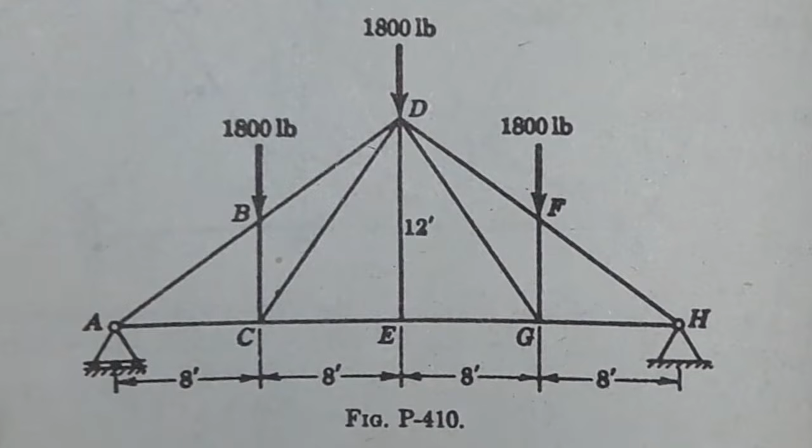So, ngayon, today is ano bang araw ngayon? Check ko ha. Tuesday, October 27, 5:58 PM. So, yun.

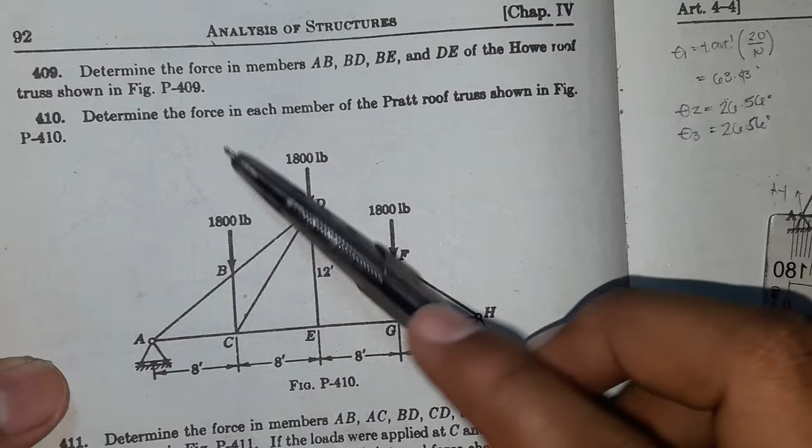So ngayon, yung problem natin is nandito pa rin tayo sa analysis of structures. So, problem 410: determine the force in each member of the Pratt roof truss shown in figure

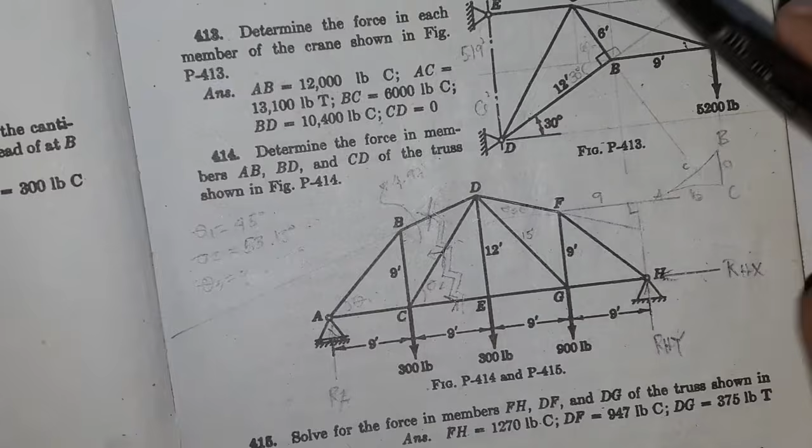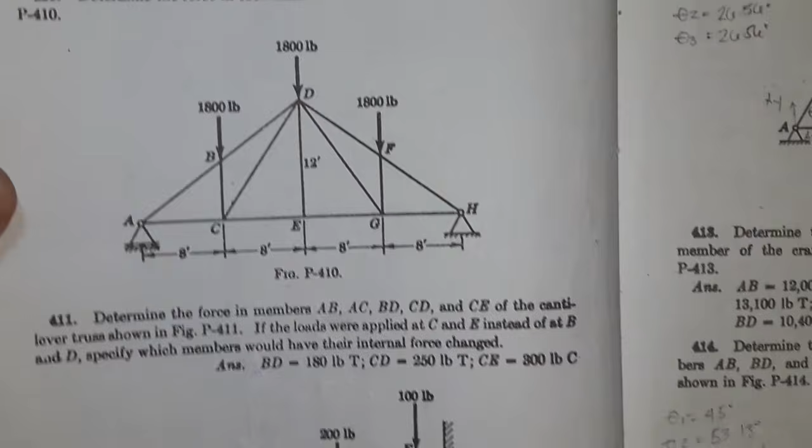P-410. So ito yung problem natin, and still gagamit pa rin tayo ng joint method. Siguro hindi ko na isusolve tong lahat na to para matakil ko agad yung method of section, siya na kasi yung sunod para kung may hinahabol yung iba na exam na may method of section, so at least may idea na yung iba. So sige, drawing ko lang to and start na agad tayo.

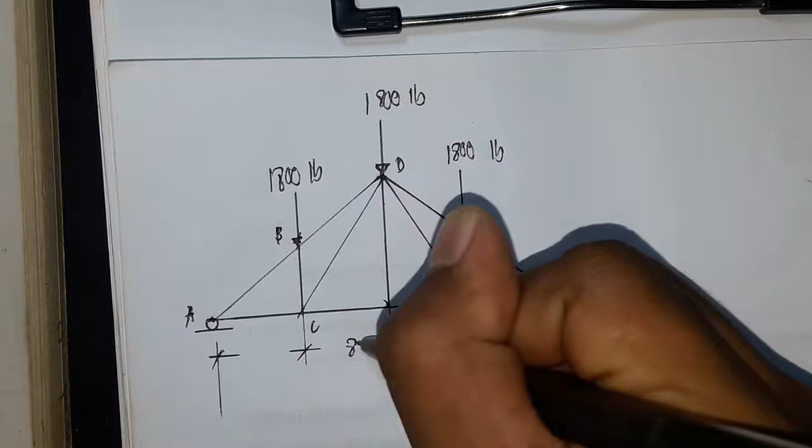So yun guys, drawing ko na siya. Medyo nakuha ko naman yung drawing, yung figure sa book. So ito yung given natin, my roller and my hinge. So we are asked to determine the force in each member.

So if nakikita nyo, yung figure natin is symmetrical siya. So may 1,800 dito, may 1,800 dito, and sa gitna also, meron tayong 1,800. So we can conclude na yung AB is yung stress or yung force, at yung stress o force sa member AB ay equal to FH. Isulat ko na lang dito yung mga equal stresses.

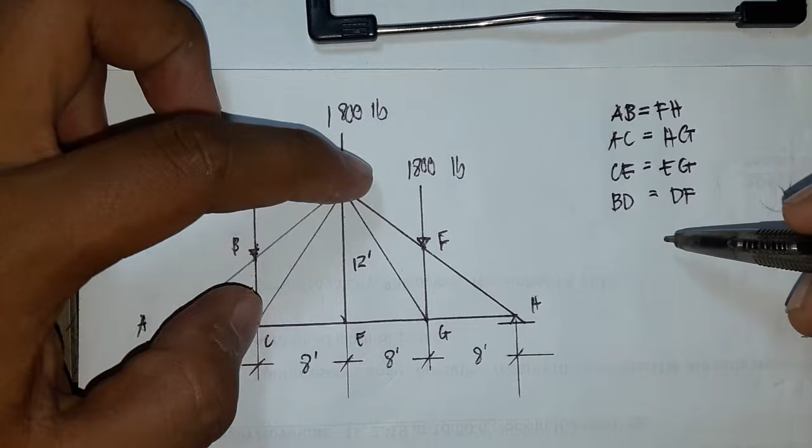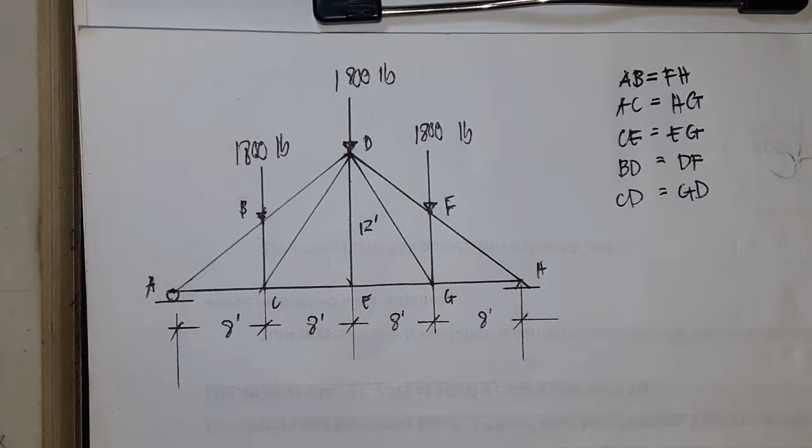Yan na, medyo nawawala-wala yung recording ko. So again, ito yung mga same forces. So ngayon, hahanapin na natin using method of joints.

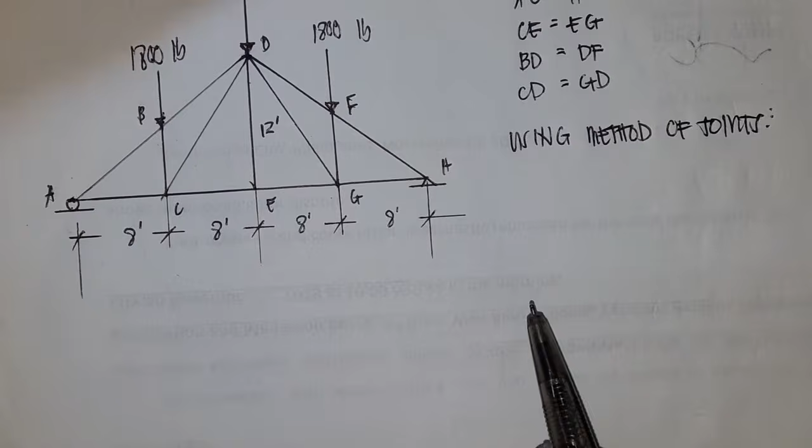So yan, using method of joints. So first, gaya ng sabi ko dati is unahin natin, pero inspect natin yung problem. Dito per joint, syempre yung pinaka less na member na pwede nating unahin ay yung joint A and joint H kasi may dalawang member lang sila. So ngayon ang una natin gawin is hanapin natin yung reactions para may magamit tayo sa joint na yan.

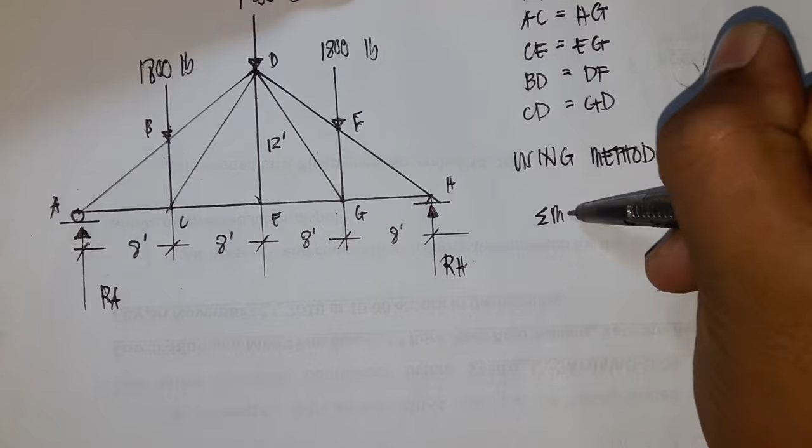So reaction at H and RA, yan sila dalawa. Summation of moment lang tayo on each point. Summation moment at H equals to 0. Zoom out ko lang konti kasi medyo hindi na siya ma-fit sa frame.

Yan, so ngayon RA positive 2, so 8 times 4 is 32. Then yung 1,800 natin, lagay na lang natin 1,800 times 3. So meron tayong minus 5,400.

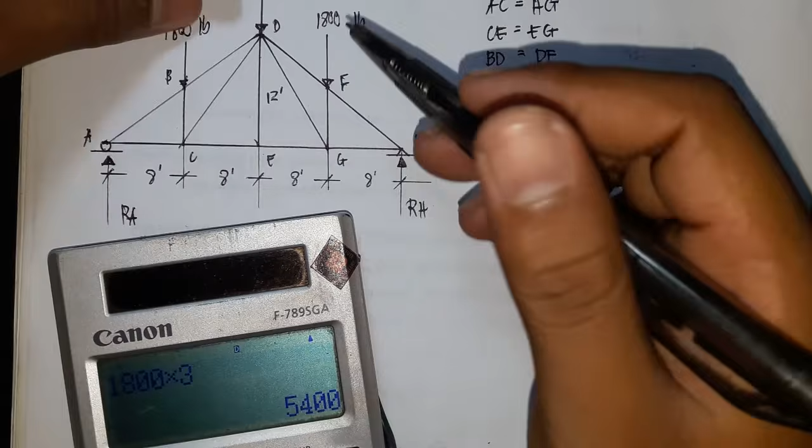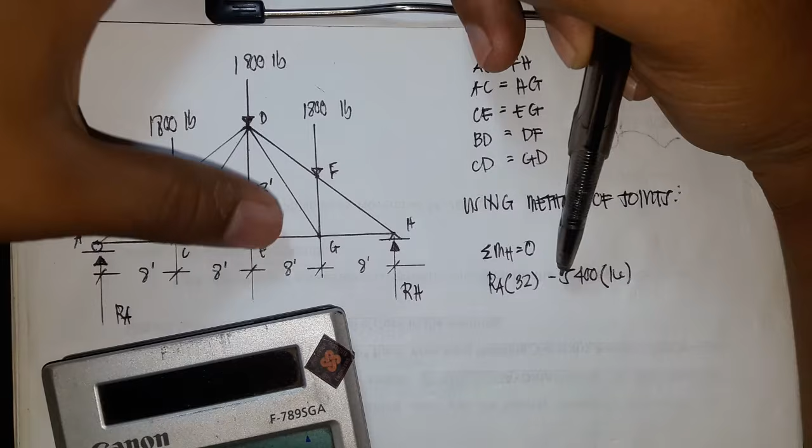So yung distance is 16, pwede nyo din siyang isa-isahin guys. Pwede nyo siyang gawing 1,800 times ito, at itong 1,800 times 8 and 1,800 times 16. Sa akin, diniretso ko, kinuha ko yung resultant nila, at alam ko na yung resultant ng tatlong to ay 5,400, at dito yung location niya sa gitna kasi symmetrical naman to. So dito siya yung location ng 5,400. Ginamit ko na yung distance na 16, pero pwede nyo din yung isa-isahin.

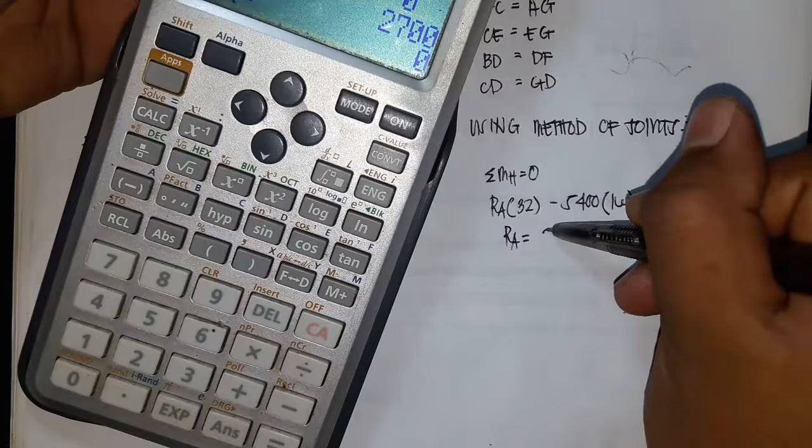So ngayon yan equals to 0. So RA ko is 32x minus 54 times 16 equals 0. So meron akong 27.

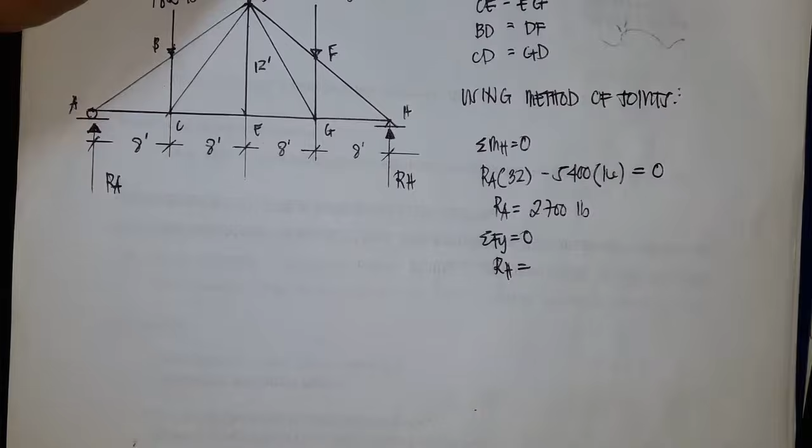Then next, pwede nyo din mag summation of forces y equals to 0 para makuha yung RH, for the record lang. So 27 plus x. Hindi ko na isusulat yung equation, guys. Syempre meron 27.

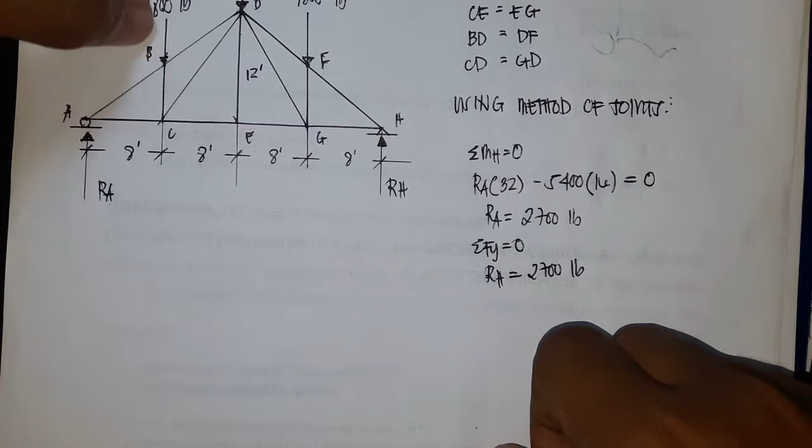Pwede nyo din naman idiretso guys kasi symmetrical lahat, so kung ano yung dito, most probably dito rin 27 para ma-counter yung 5,400 na loads, yung tatlong loads na to. Syempre same talaga yun sila. So yun, mayroon na tayong reactions.

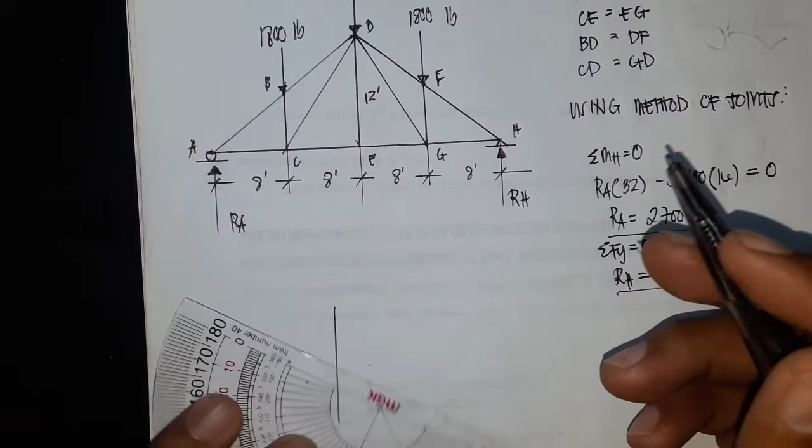Ngayon start tayo mag method of joints, ako start ako dito sa A. Gawa ako ng cross dito, lagay ko at joint A. So at joint A meron akong RA which is 2700, tapos meron akong AB and meron akong AC. So kailangan kong hanapin to, yung angle na yan.

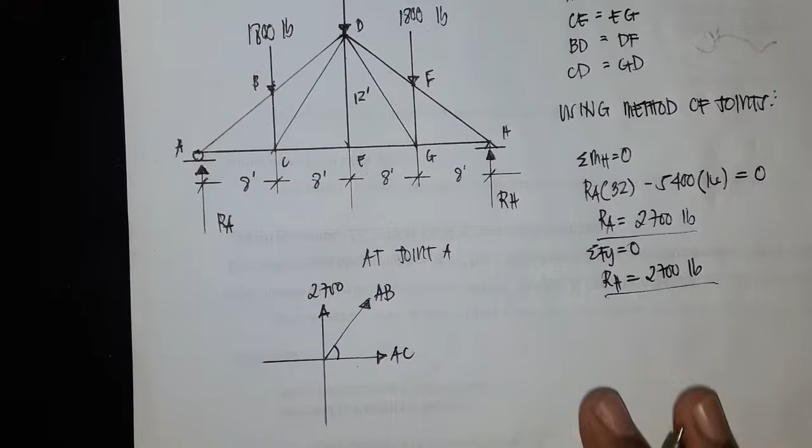So yung angle na yan is theta. Syempre alam niyo naman sa point na to kung paano maghanap ng angle, so 36.86, yung theta dyan. 36.87, round off ko na lang para hindi tayo ma-short.

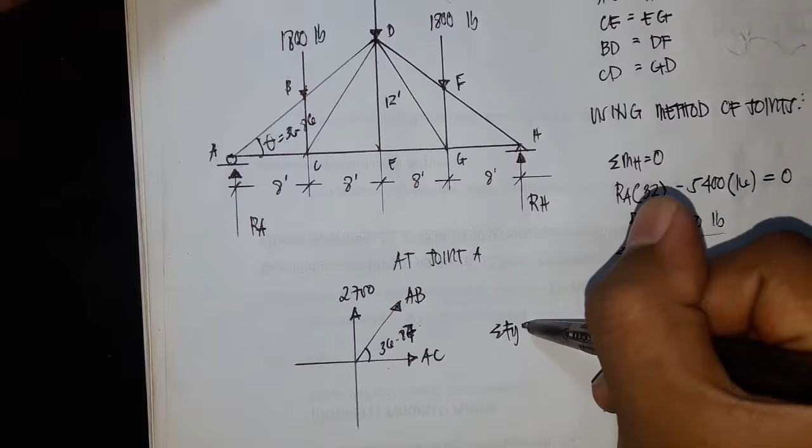So ngayon masosolve ko agad yung AB. Summation of forces y equals to 0. So 2700 plus AB sine 36.87 equals to 0. So AB, 2700 plus AB sine 36.87 equals to 0.

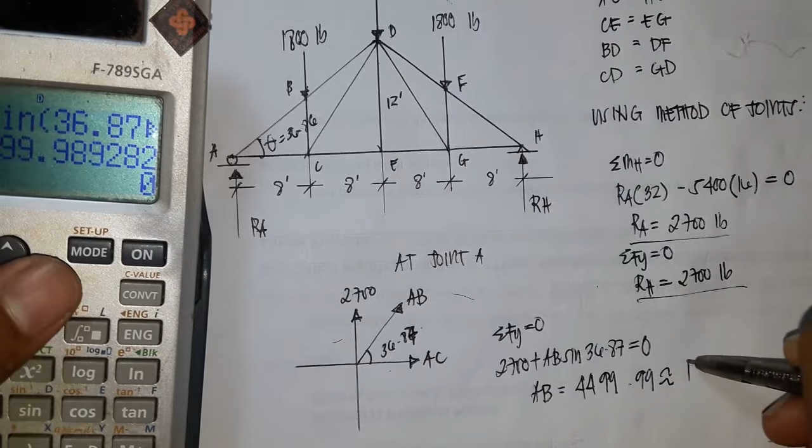4499.98, so 45 siya, compression. Correct ba siya? 36. 4499.99, or pwede na siyang gawing 45 compression.

So yan. Ngayon meron na tayong AB. Dalawa na yung nasolve natin, AB and FH. Therefore we conclude na yung isusolve lang natin is half itong part lang nito, di ba?

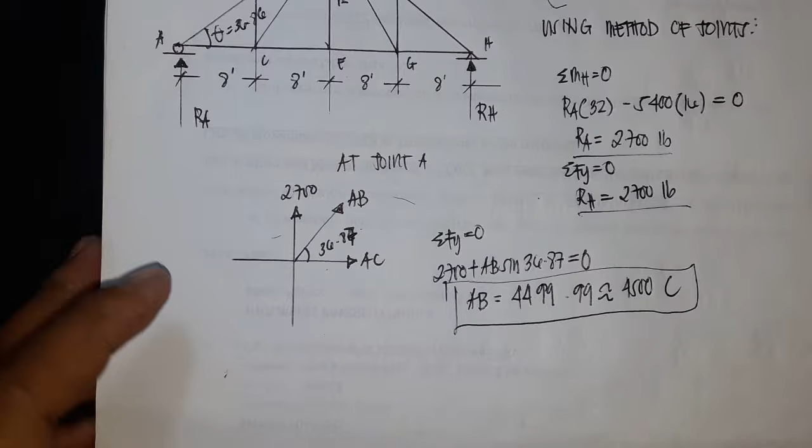So AC meron na din tayo. Tatlo na lang yung kulang natin kasi equals lang din naman yan sila lahat. Ngayon for BD and BC, hindi tayo pwede maka joint method dito kasi meron tayong AC pero may 3 unknowns tayo, and yung equation natin alam natin na dalawa lang, so hindi tayo pwede mag joint method dito.

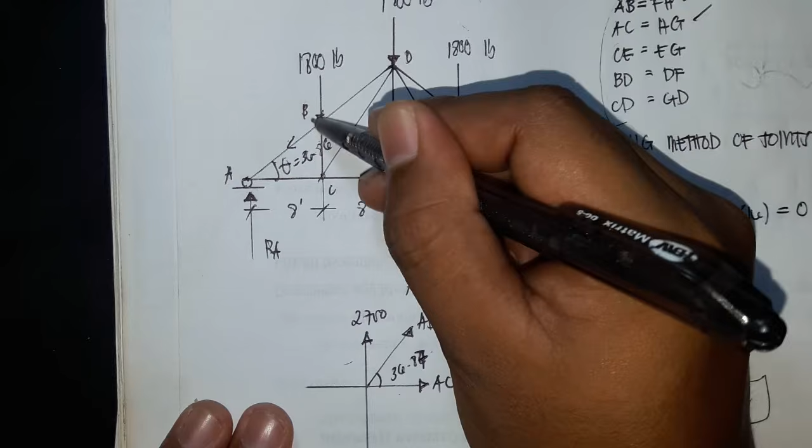So dito tayo sa point B or joint B kasi meron na tayo dyan. Dalawa yung unknowns natin, BD and BC. At joint B,

Lagay ko dito yung 1,000. So 1,800. Dalawa yung forces going down. Meron akong 1,800. Meron akong BC. Tapos meron akong ganito, which is BD and BC.

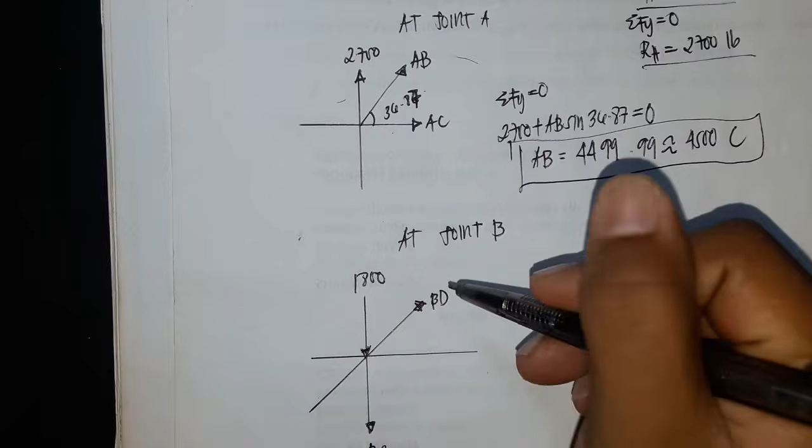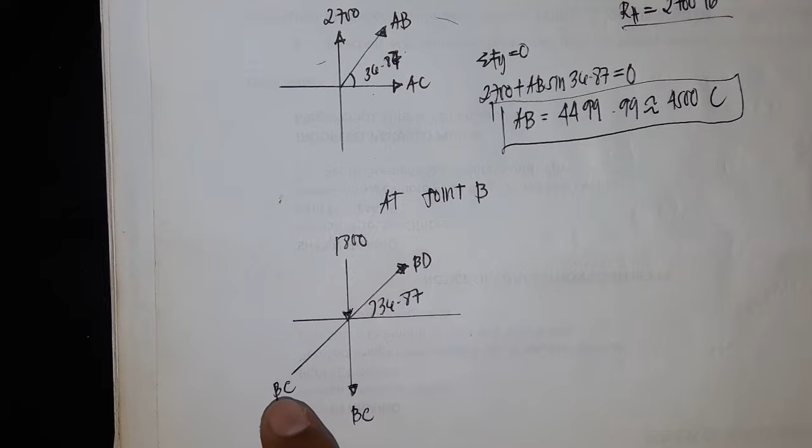Ngayon ang angle same lang, 36, di ba? Same lang, 36.87 yung angle dyan. Pag mag summation of forces x ako, meron na akong answer dito, di ba? BC, I mean yung BA to BA.

Yung BA ko is compression, meaning going up pala siya. So AB is compression, ganito siya guys. Dun going siya to the center. So BA is 4500 na siya. Dahil compression yung answer natin dito sa AB, meaning pagdating dito is compression din siya. So yun, going siya dun sa joint o sa point ng B.

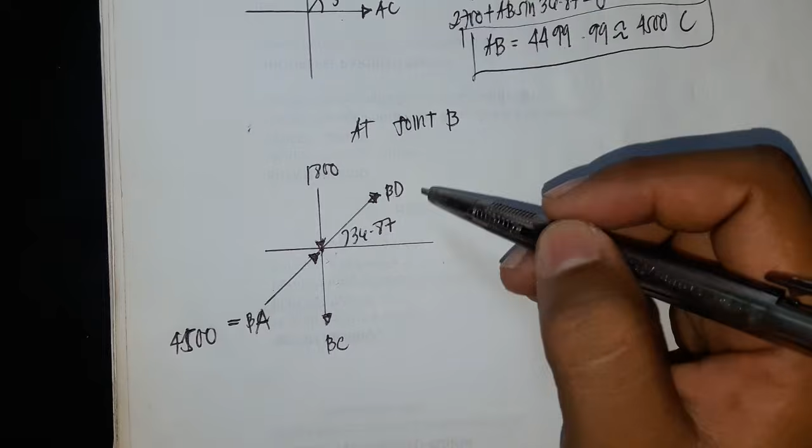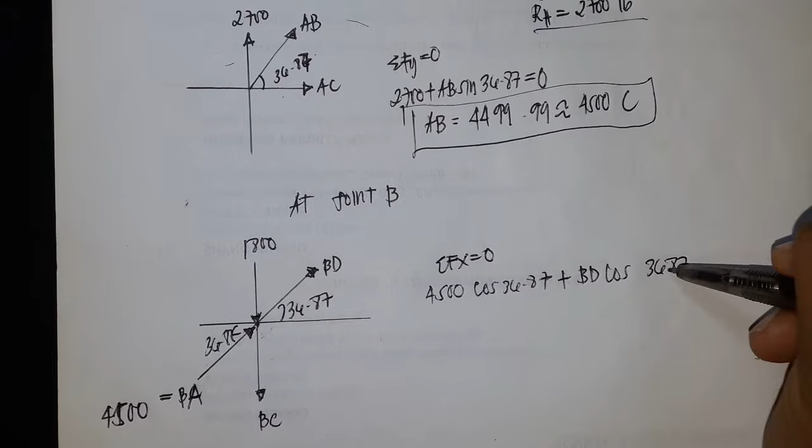4500. So mag summation of forces y ako or x, masosolve ko agad yung BD. Summation of forces x equals to 0. Meron akong positive 4500. Same, 36.87. Cosine of 36.87 plus BD, cosine of 36.87 equals to 0.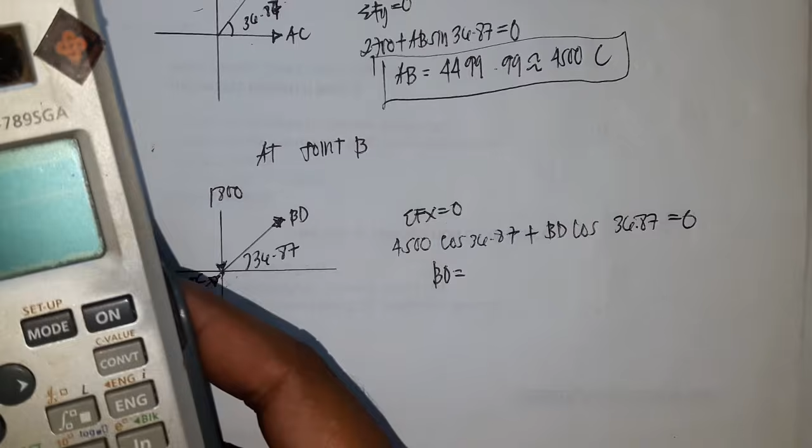So BD, yun, hula ko compression pa rin to. 4500 cosine 36.87 plus BD cosine 36.87 equals to 0. So yun, same, 4500 pa rin siya. Siyempre kasi transpose and divide, summation of forces x, tama.

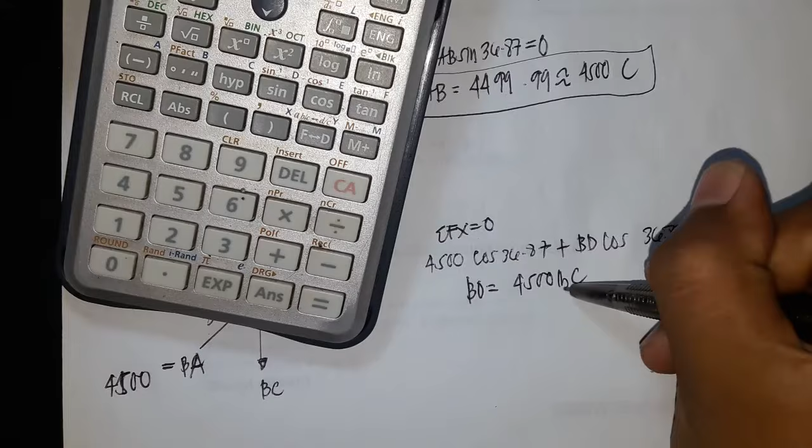So 4500 compression, so lb yun. BD, check na yung BD natin, meaning yung DF is solved na rin. Next is yung BC, summation forces y equals to 0.

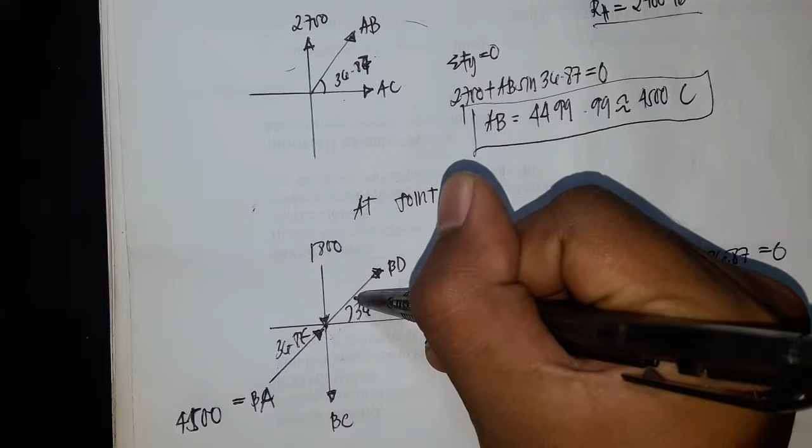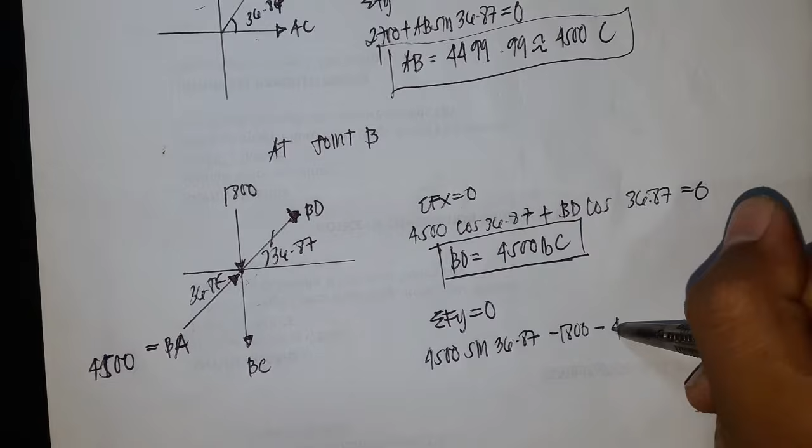So yan mali, ilagay ko ng slash ako dyan para malaman ko na wrong yung direction ng BD ko, meaning instead na going doon papalayo o tension, dapat going siya papaloob. Ngayon, summation of forces y, meron akong 4500 BA sine of 36.87, meron akong 1800, tapos meron akong minus na 4500 pa rin sine of 36.87. So plus or minus BC equals to 0.

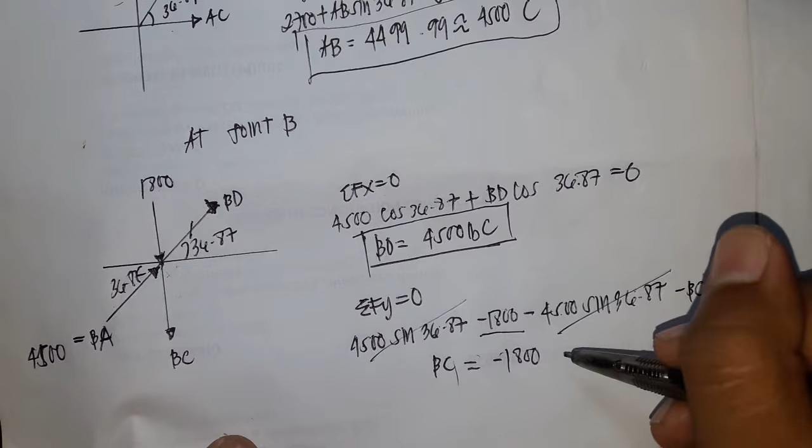Kung napapansin nyo, 4500 sine 36, 4500 sine 36, so cancel out na yun sila dalawa. So BC, transpose natin sa kabila yung BC. Yung remaining na value natin is yung 1800. So positive yung BC, meaning yung 1800 is remaining siya na negative. So yun, compression pa rin yung BC natin.

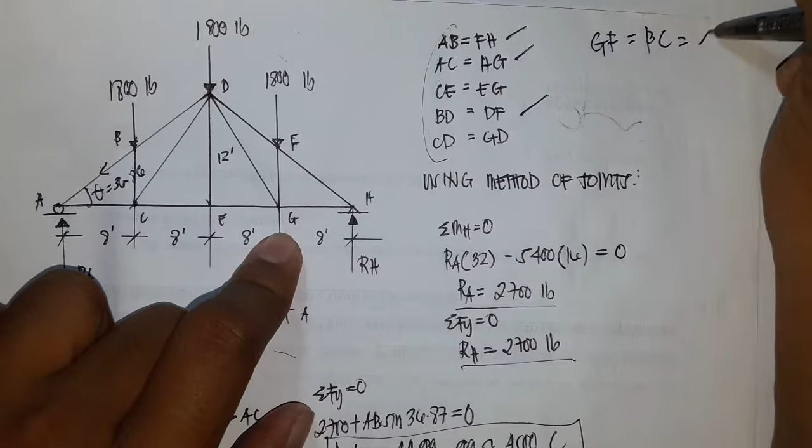So BC, saan yung BC? Hindi ako nakagawa ng BC at GF. Wala, GF equals to BC. Check na yan siya. Yun, kulang na lang tayo ng dalawa. So CE and CD.

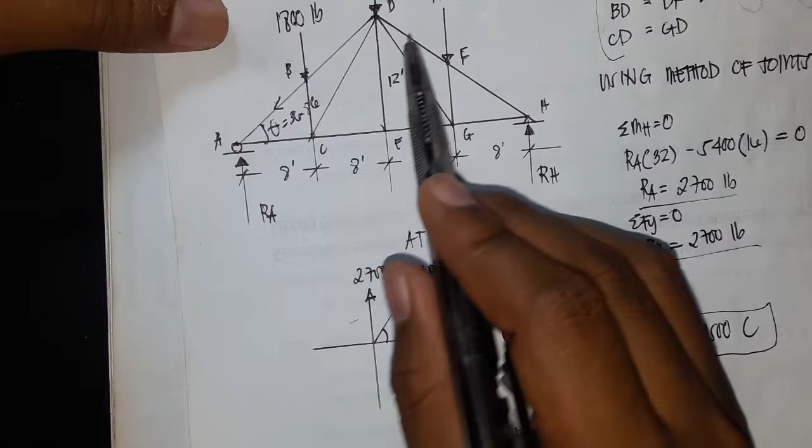Ngayon at joint C na tayo, kasi meron na tayong ito and meron na tayong AC and BC. So yung ano natin dito is CD and CE. Yun. Pasensya na, may nag-chat lang sa akin.

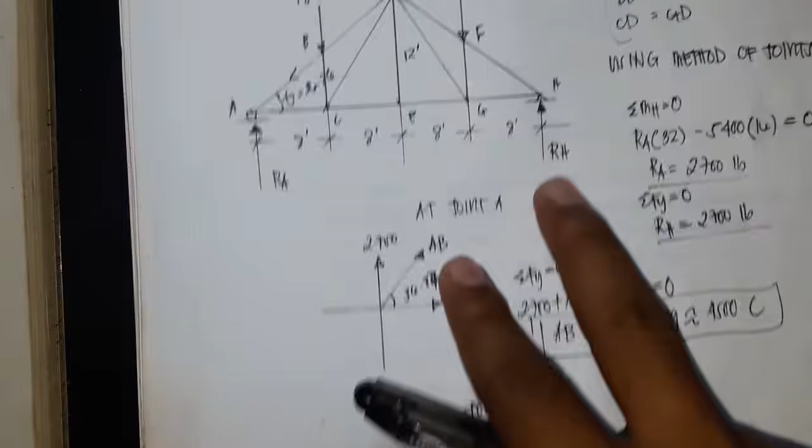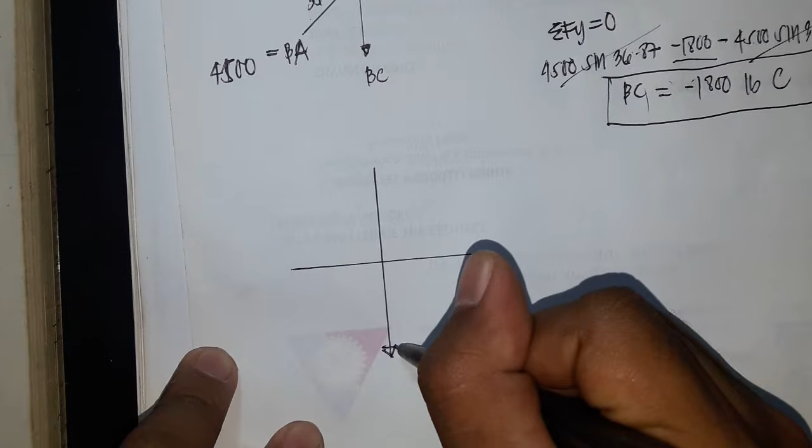Ngayon, continue tayo sa joint. Sa joint C tayo guys, joint C. Kasi yun na lang, kasi nasunod na natin yung tatlong yung ibang. Sa joint C, meron tayong BC. Yung BC natin is compression, so ilagay ko siya sa baba. Ilagay ko yung BC natin dahil compression siya.

So dito tayo, di ba? Sa itong part na to, focus kayo dito sa CB, CA, and CE, and also CD. Dyan tayo part na guys. Dahil compression ng BC ko ito, so ilalagay ko siya dito sa baba. 1800.

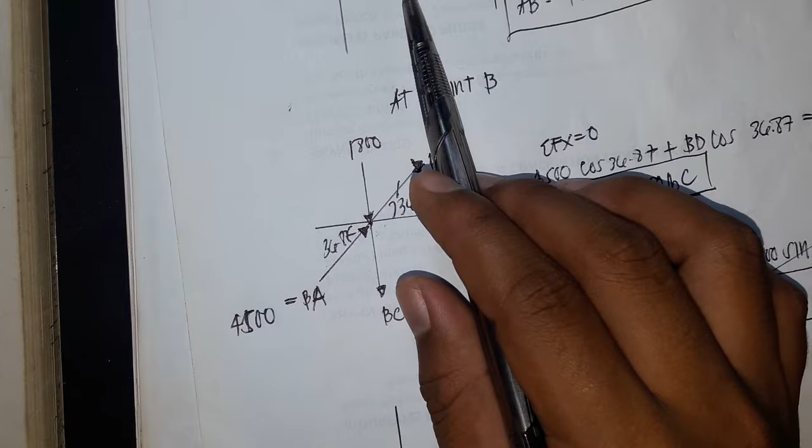Tapos yung AC ko is compression ba siya? AC. Sana yung AC ko dito. Hindi ko sinolve yung AC kanina. Hindi ko siya sinolve, no. So balikan ko to.

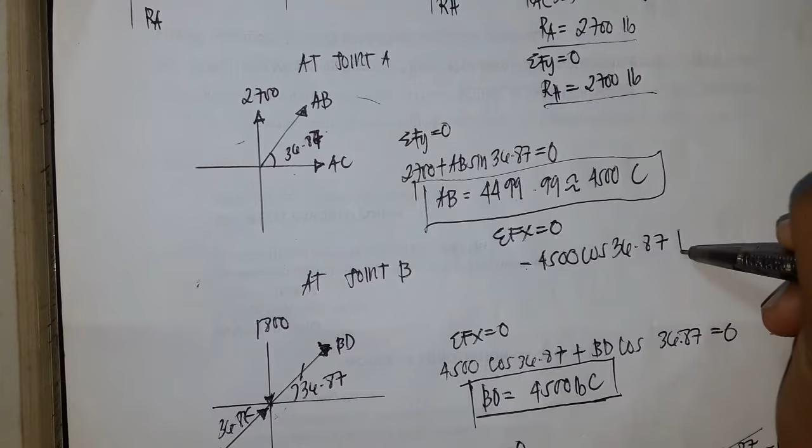Summation of forces x ako. Summation of forces equals to 0. AB compression, meaning going to the left, so minus 4500 cosine of 36.87 plus AC. Yung AC ko, sorry, nakalimutan kong isolve yung AC kanina. 4500 cosine 36.87 plus AC.

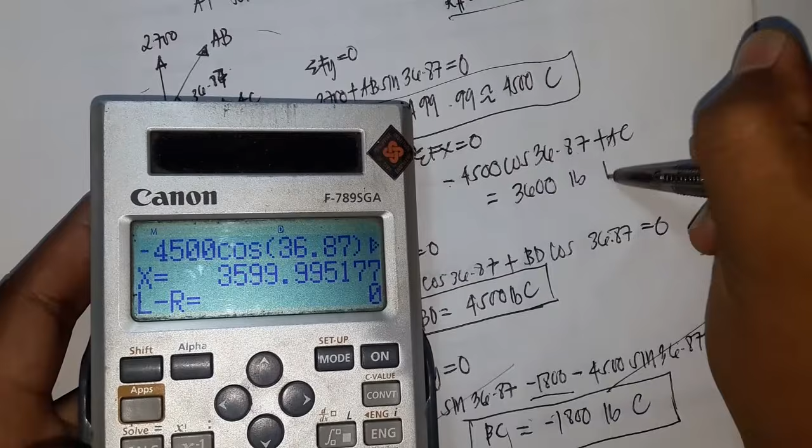So yun, 3599, 3600 na siya. Round off natin siya. 3600. So, positive meaning tension siya. Tension yung AC natin.

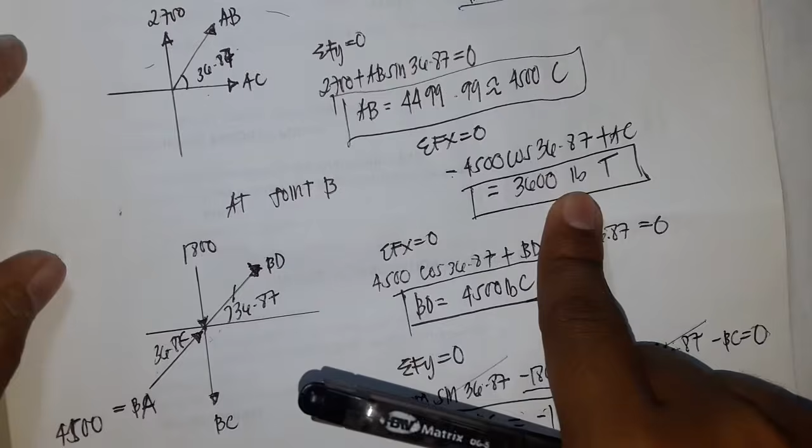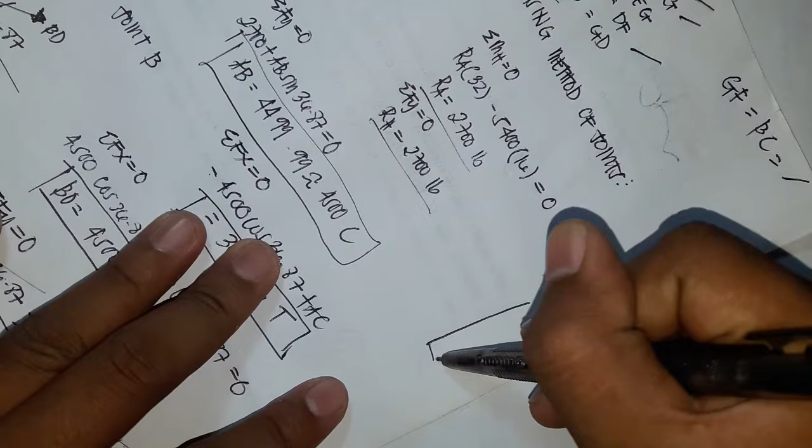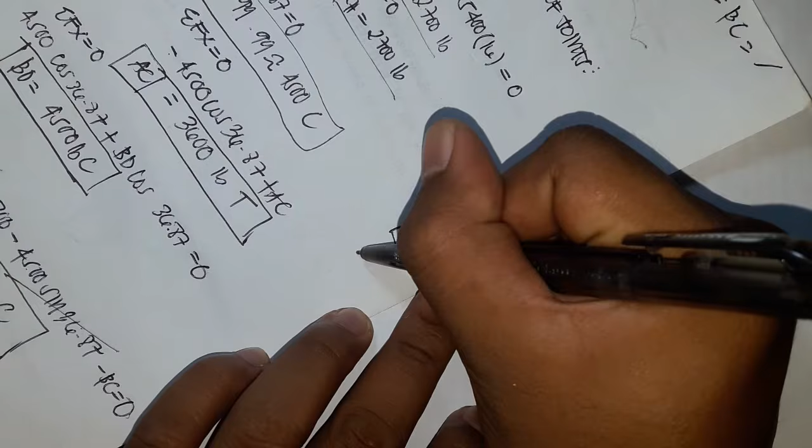So, AC is 3600, meaning it's tension, so tension din ilalagay natin. Meaning guys, kapag tension and compression - pag tension, hinihila niya or going out yung force. For example, ito yung member AC, tension siya, di ba? Nasolve ko member AC, so ito yung AC is tension siya. Para ma-visualize nyo lang, meaning yung forces dyan is hinihila niya, yung stresses dyan, hinihila niya si AC, which is 3,600 and also 3,600. Yan yung parang visualization niya.

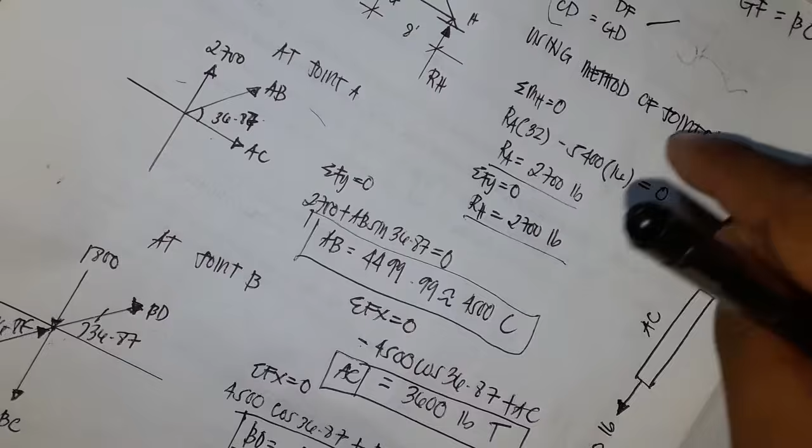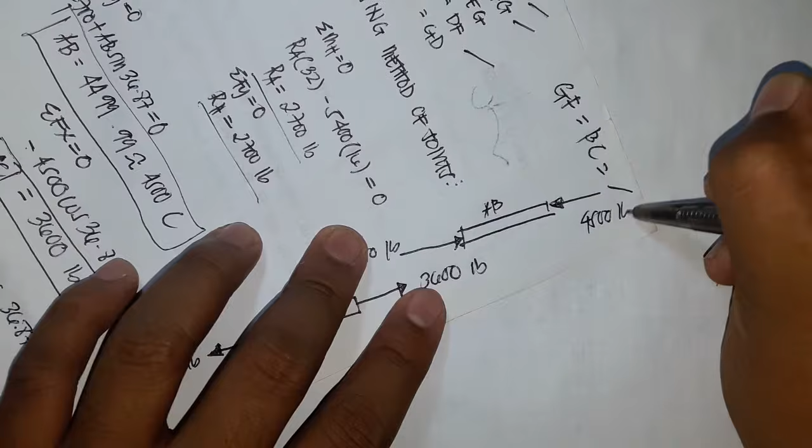Tapos kapag compression naman, so ano yung example natin dito? So AB, si AB rin for example, member AB. Compression daw siya, so meaning iniipit niya si member AB, which is 4.5, 4.5 yung magnitude. Yan yung compression siya. See, ito yung tension.

So pag may ibang visualization, share nyo na lang sa akin.

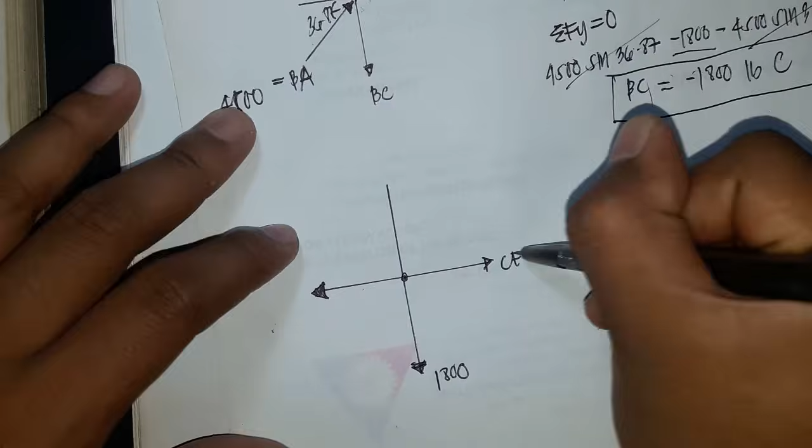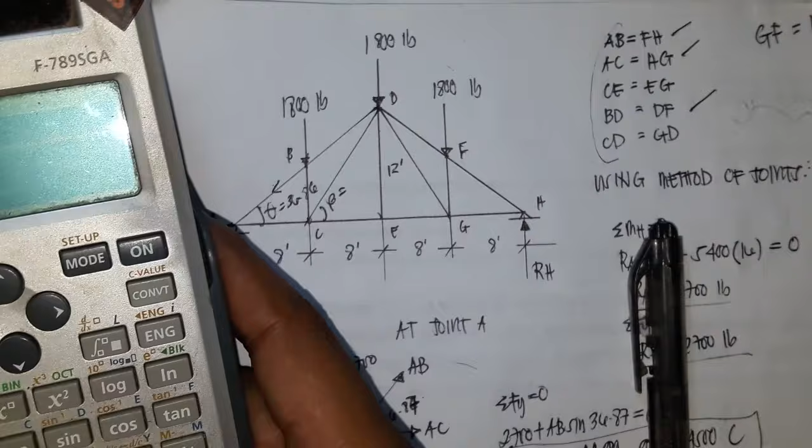So ito yung CE, yung CA ko is 3.6. Then meron akong CD, ito yung CD. Siyempre may angle ako dyan, ito yung angle dyan. Lagay natin yan, so again tangent tayo, 12 over 8, meron tayong 56.31.

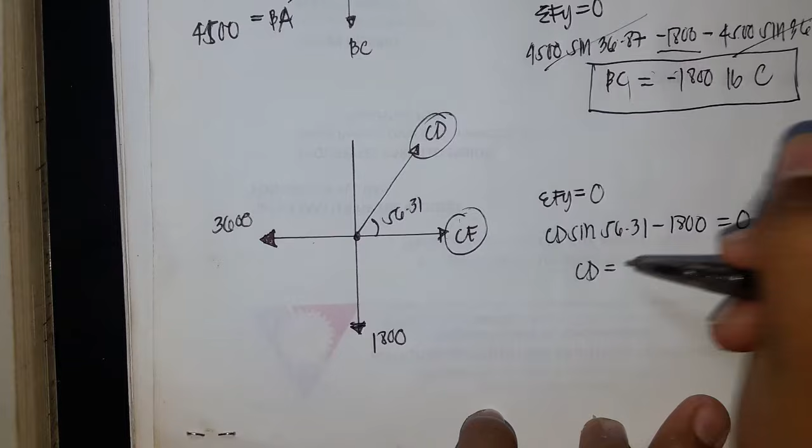So ngayon guys, makita yung figure natin. By summing up forces Y, masolve agad natin yung CD. Summation of forces X, solve yung CE. Summation of forces Y: CD sine 56.31 minus 1,800, yun lang, meron na tayong CD. X sine 56.31 minus 1,800 equals 0, so meron akong 2,163.33, tension siya guys.

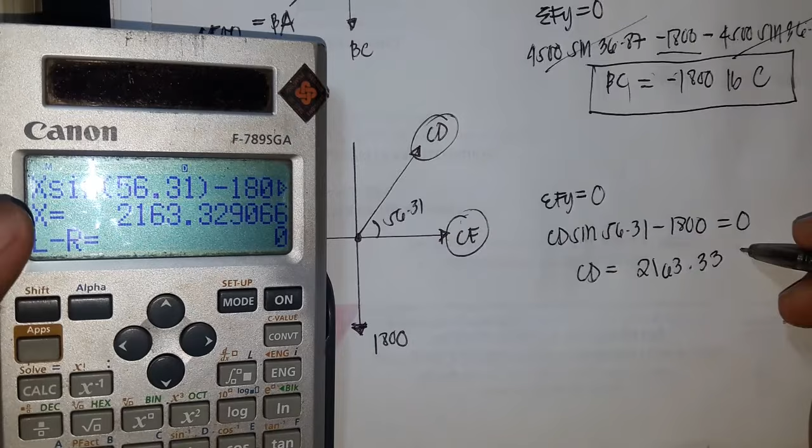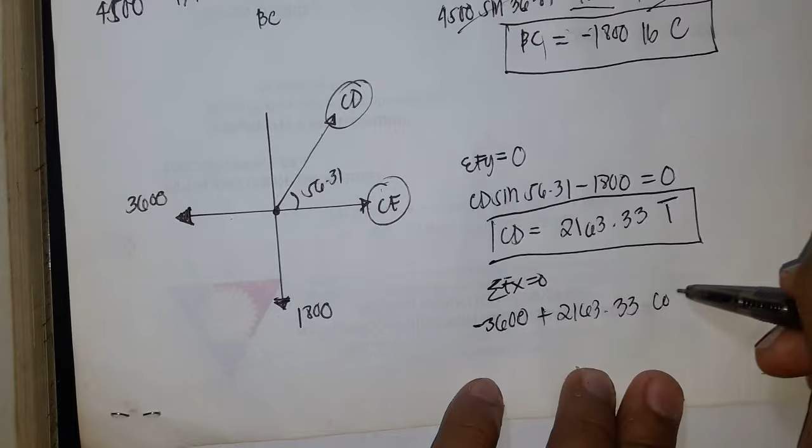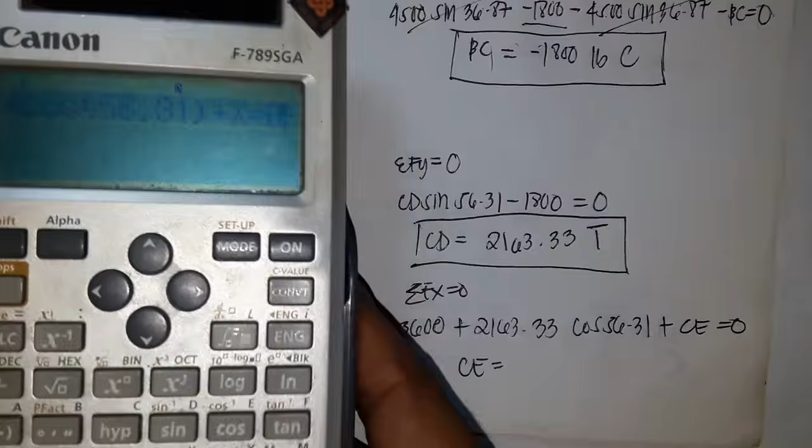Meaning correct yung natin yung direction or yung pag-assume, meron tayong CD which is tension. Then summation of forces X equals 0, meron tayong 3.6, meron tayong CD which is positive. 2,163.33 cosine of 56.31 plus CE equals 0. So CE: negative 3.6 plus 2,163.33 cosine of 56.31 plus X equals 0, meron tayong 2,400 tension. Meron tayong tension dyan.

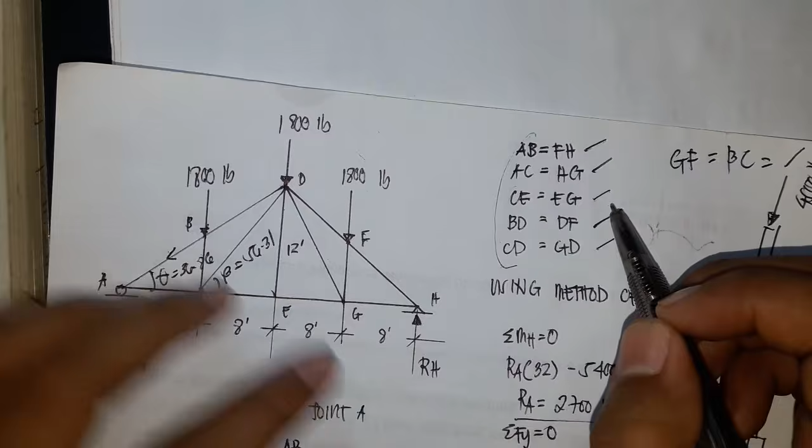So CD and CE, nasolve na natin sila lahat guys, 1, 2, 3, kasi lahat ng members na yan. But if napapansin nyo, meron tayong remaining member na hindi na-solve.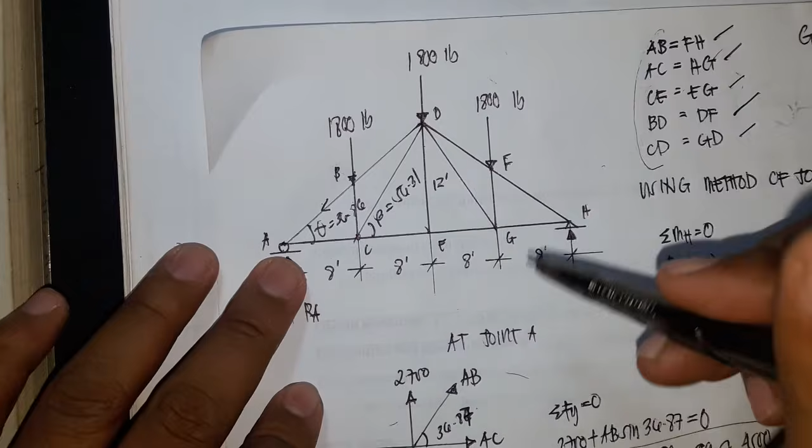So ito yun, yung DE, diba sa gitna. Kasi wala naman siyang ibang parang kakambal kasi mag-isa siya sa gitna.

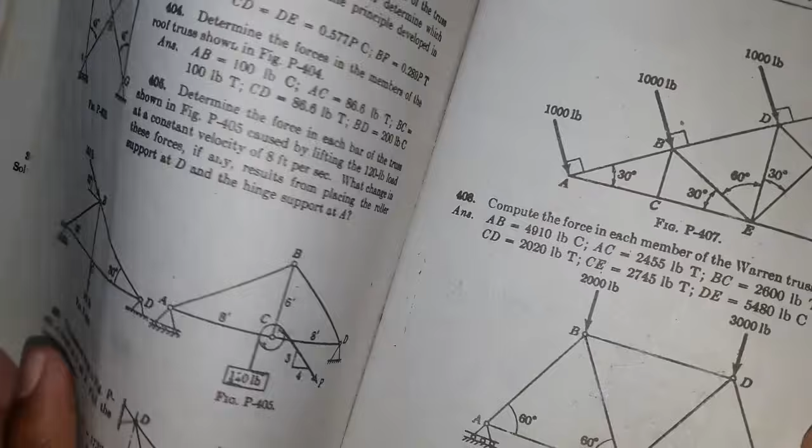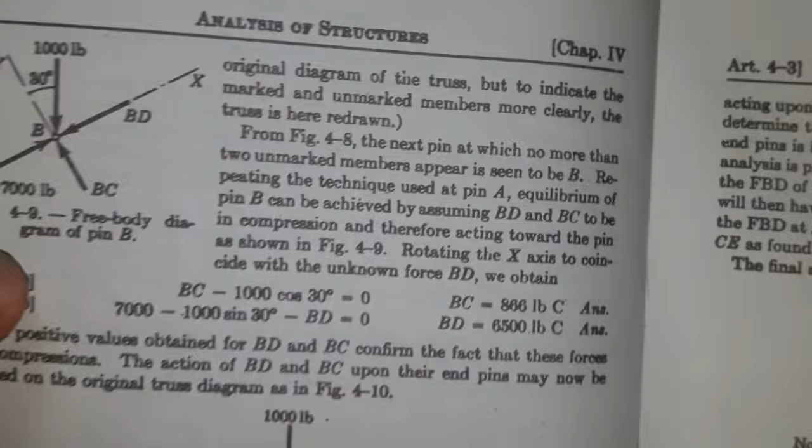Pero again, gaya ng sinabi sa book, if naalala nyo sa previous video ko, sana yun, pakita ko lang ulit. Saan ba yun? Dito ata yun. Nakita nyo yan, hindi pala yan, so ito pala.

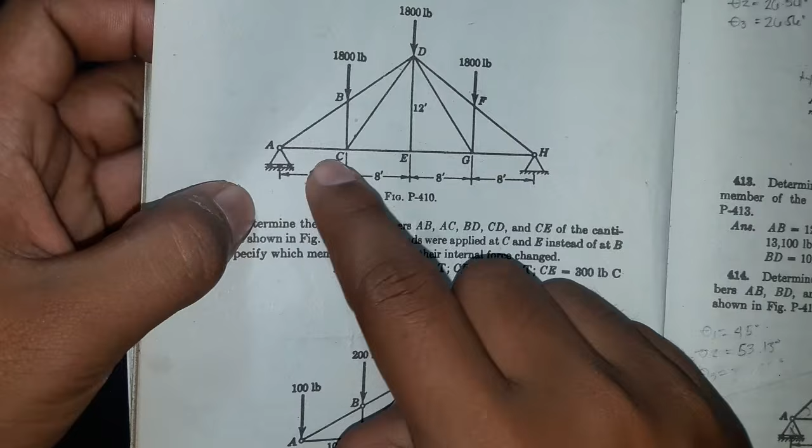Kabila: at a joint subjected to the action of 3 members. As you notice dito, yung at joint E, meron siyang EC, EG, and ED, so pasok siya dun sa 3 members na sinasabi sa book. Then but no other load - check nyo yung joint E, walang ibang load, wala siyang ibang load sa joint E.

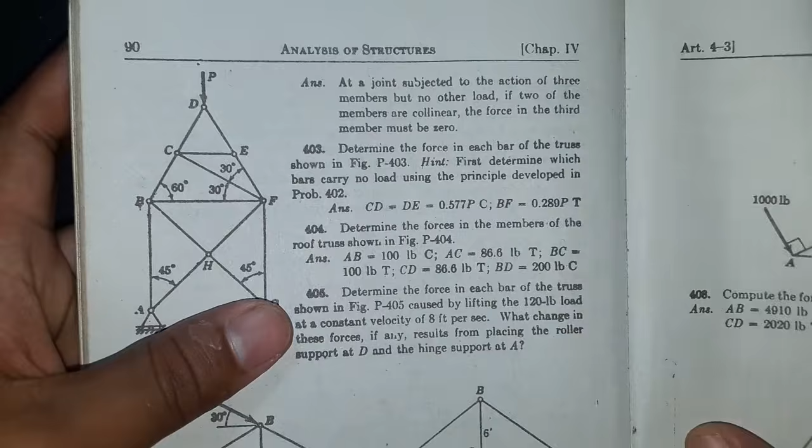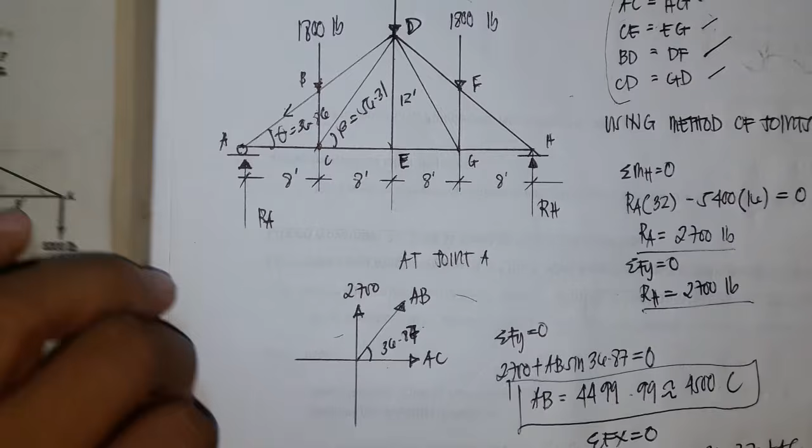If two of the members are collinear - collinear yung EC pati EG kasi isang line lang sila, di ba? One line only, collinear. The force in the third member must be 0. So follow lang natin yung sinabi ni book ni Ferdinand L. Singer. Ngayon ilagay ko na lang dito, DE or ED is 0. But not all the case guys, kasi kapag yung members nyo is collinear, meaning may ganyan, tapos may third member, pero may force siya dyan.

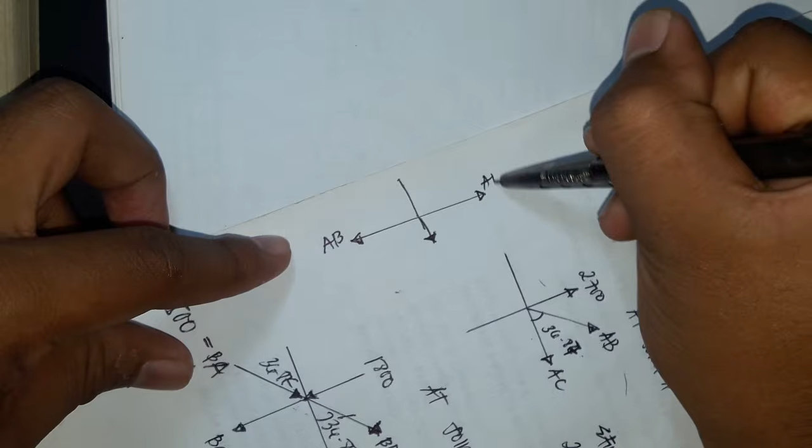So ito lang yung, for example, ito yung AB, AC, and AD. Pero merong load na same ganito, for example itong 1800. So pag nilagyan natin dyan ng load, for example 1800, yung third member is hindi na 0, diba? Kasi nakita nyo naman, mag-summation ng forces Y kayo, may value talaga siya which is 1800, diba? So yun lang naman yun.

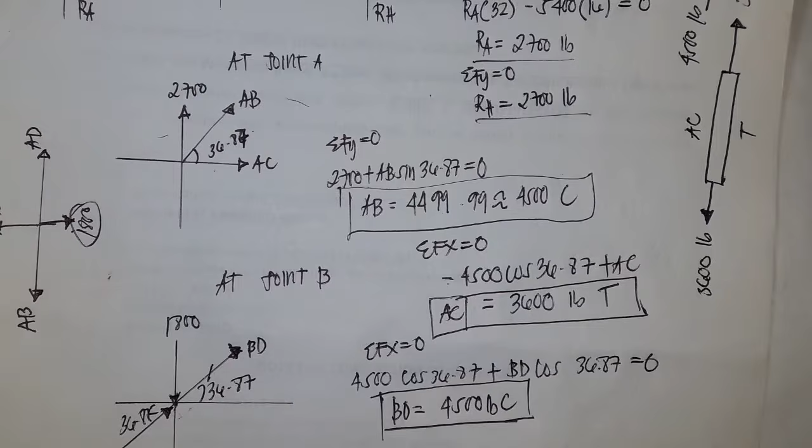So yun guys, ito yung, huwag kayong malito itong mga nakasulat sa side, huwag nyo na lang yan pansinin. So ito yung whole solution ko.